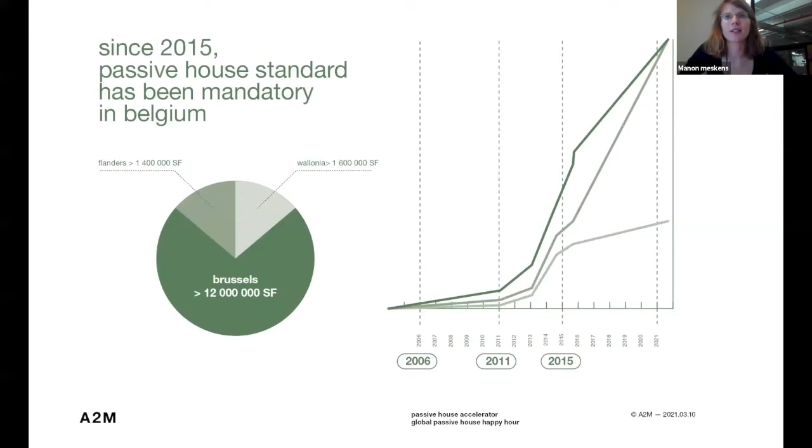The reason passive house was part of my education program is because since 2015, passive house standard has been mandatory in Belgium for new buildings and for renovations. So the number of passive house buildings increased exponentially over the past 10 years, especially in Brussels.

Today you can see all kinds of buildings, all types of programs that are passive house in Belgium. It's very inspiring, and they all look very different. You have Jean Nouvel's tower here for the police headquarters, and you have the parliament of Brussels, also a very unique building.

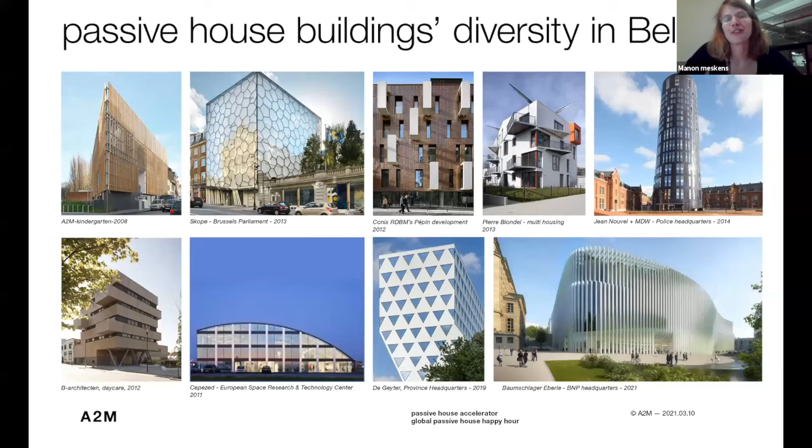We'll soon have a prison that will be passive house, which is kind of funny. When you think about the buildings in the States that are passive house, they're very fancy buildings, and we're going to have a prison. I just thought it was unique.

Sébastien Moreau, the founder of A2M, started designing passive house buildings 21 years ago. With this long experience, we passed the point where passive house standard is standard. It should be mainstream and accessible to everyone.

Our team is composed of engineers, and we start the energy analysis of each of our projects at the conception phase, which helps a lot to keep the cost as low as possible. Today, A2M has 3 offices: one in Brussels, one in Lisbon, and the New York office that I manage. I'm in New York right now.

For tonight, I wanted to focus on 2 retrofit projects because retrofitting is going to be a big part of our job to improve our cities. With COVID and the work-from-home situation, I'm sure a lot of office buildings will have to be renovated, probably into apartment buildings.

The first project I'll go over with you is les balcons in French, the balconies in English. It's a renovation of a former office building from the 80s into 92 apartments with office and retail spaces on the first floor. We managed to keep the cost at

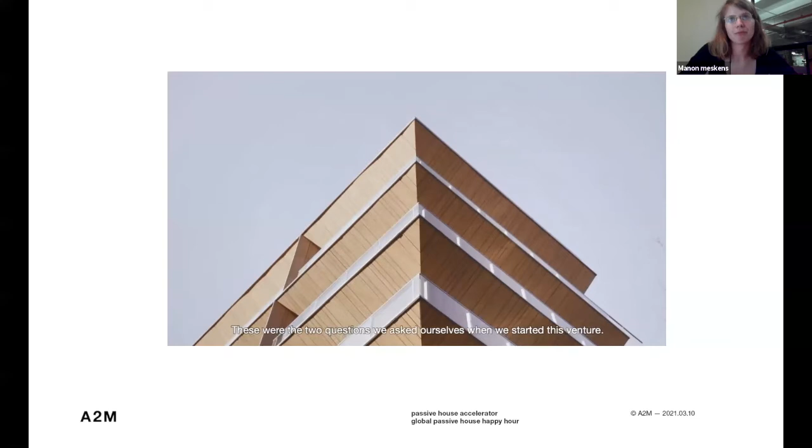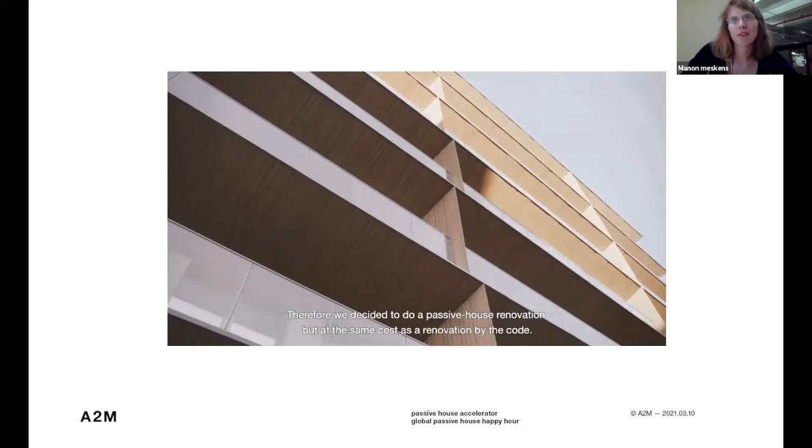The biggest challenge was to manage solar gains in our favor, so we decided to integrate continuous balconies on the south facade. Most of the apartments are facing south, and if not, they have double orientations, east and west,

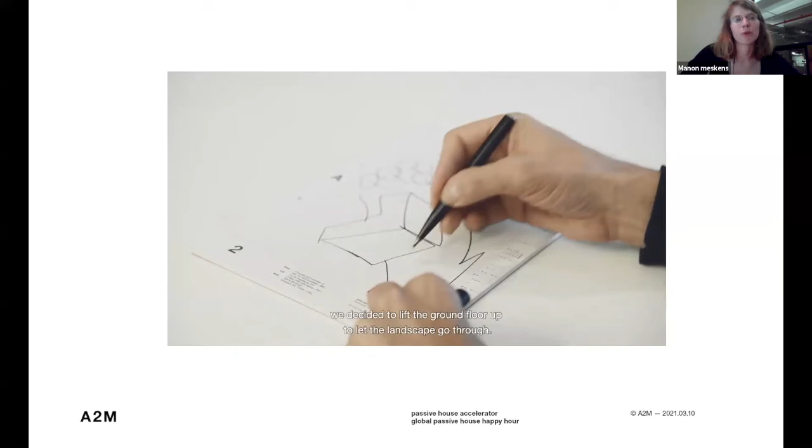which helps a lot for natural ventilation in the summer. Because of the shading devices, the balconies, and natural ventilation strategies, there's no need for mechanical cooling for this project. It's also the climate in Brussels, which is very similar to Seattle.

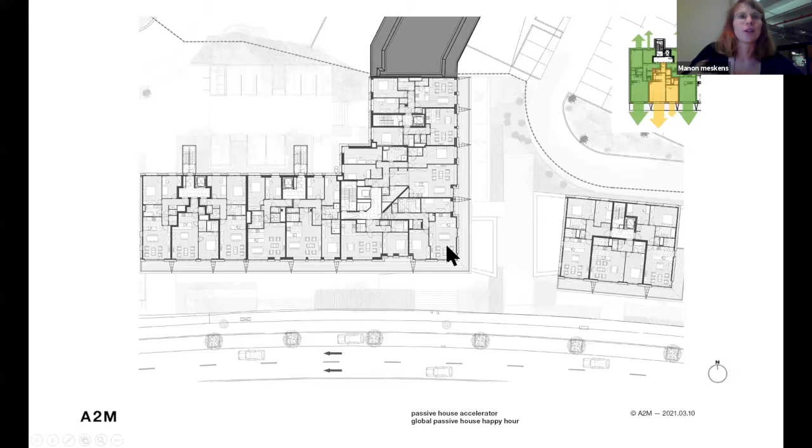I don't have time to show the whole video, but here you can see the large continuous balconies along the facade, and the apartments are double oriented or sometimes triple, which also allows for very good natural lighting.

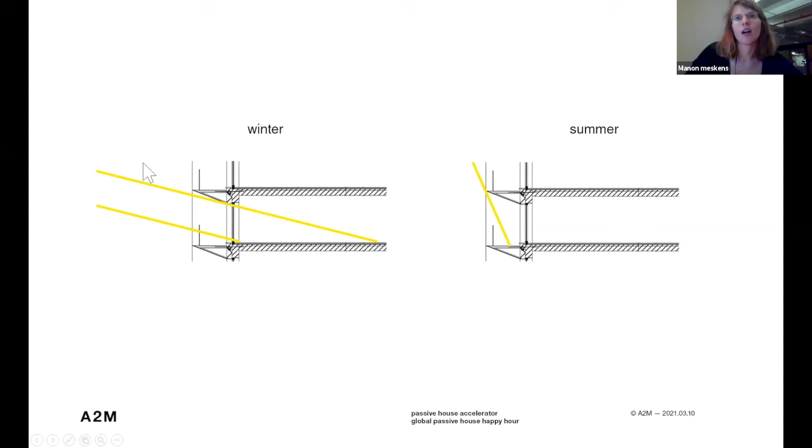The continuous balconies helped reduce the solar heat gain during the summer. As you can see here, we dimensioned the balconies so that in summer they would block the sun, and in winter they would allow the sunlight to get into the apartment.

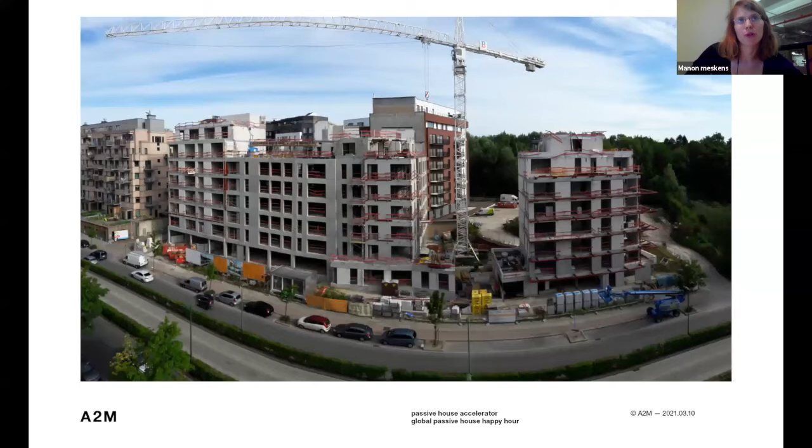This is the bare existing building, and this is during construction. So we added some extension on the side of the renovation.

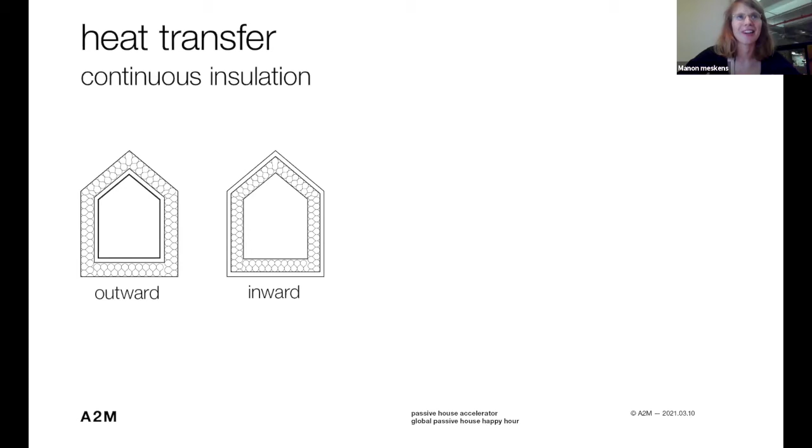We decided to go with outward insulation since we didn't want to keep the facade, the very ugly facade wasn't necessary. And we play with the insulation to create diagonal cutouts in the facade. So the punch windows are a different style.

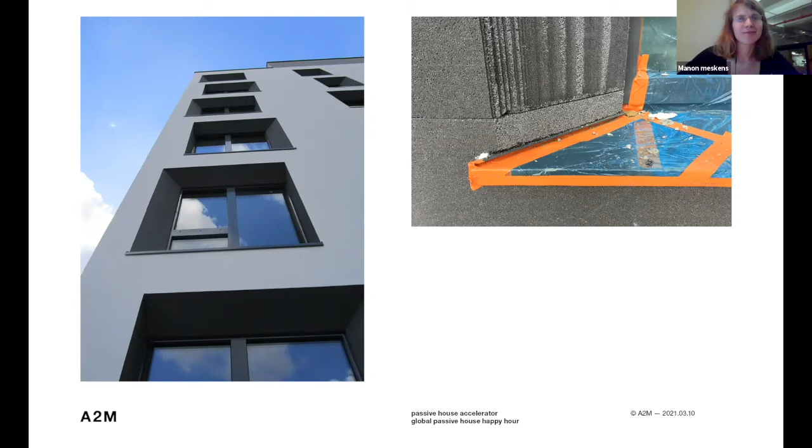And this is the detail that we do. As you can see, we have an airtight membrane here in blue, and the plaster inside is providing the airtightness.

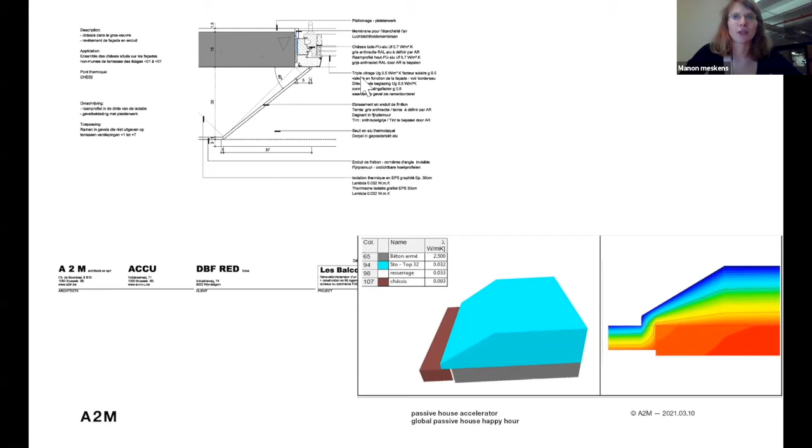You can also notice that we aligned the frame, the window frame, on the bearing wall, which is typically not what we're supposed to do, because it's better if the window is cantilevered, but we use a little trick. So here in the A detail is what you're supposed to do. You're supposed to suspend the windows so the insulation is continuous with the frame.

And the psi value is great, 0.0035. In detail B is the worst case, when you put the window frame on the bearing wall, and so there is a thermal bridge. It could be worse if the insulation wasn't overlapping the frame, but still not great. The psi value is 0.021.

And the detail C is much better and very cheap, much cheaper, but not as cheap as it could be. We're using Perinsul, so you put the window frame on the Perinsul block, but we decided to do something even cheaper, and it's to use just light aerated concrete blocks underneath the window frame.

So we ended up with a psi value of 0.016, which is clearly still a thermal bridge, but we consider it into the energy balance of the building.

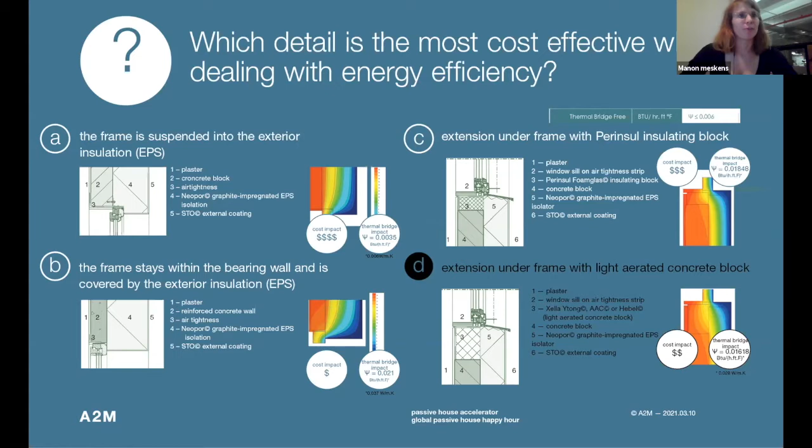And we use the same aerated concrete block for many details. Just like the parapet, instead of wrapping the parapet around with insulation, we prefer to thermally block the parapet with an aerated concrete block, and it does the trick.

The other substantial thermal bridge was, of course, the balconies. We used steel frame wrapped with rock wool and EPS covered with Trespa wood panel veneer.

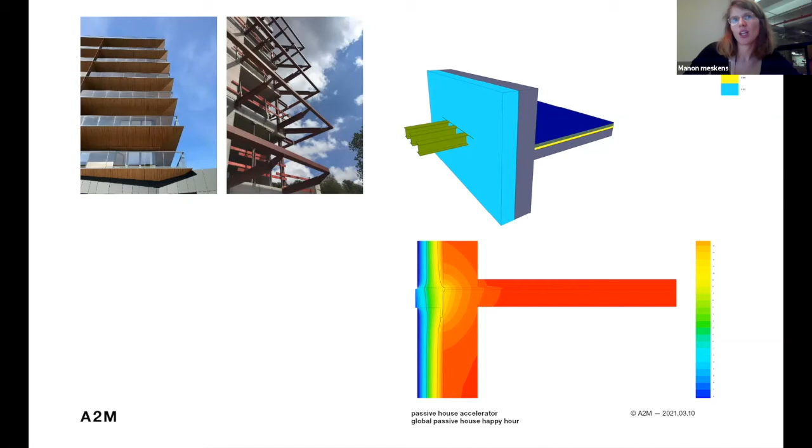Here's a detail. So, yes, you can't see all of it, sorry. So in this detail, you can see here the mineral wool, the rock wool with the EPS.

The shading device is outside the envelope, and it's hidden inside the insulation. And there is a thermally broken piece of plastic shim plate here that helps to thermally break the envelope. And we chose a mineral wool here because of fire restriction.

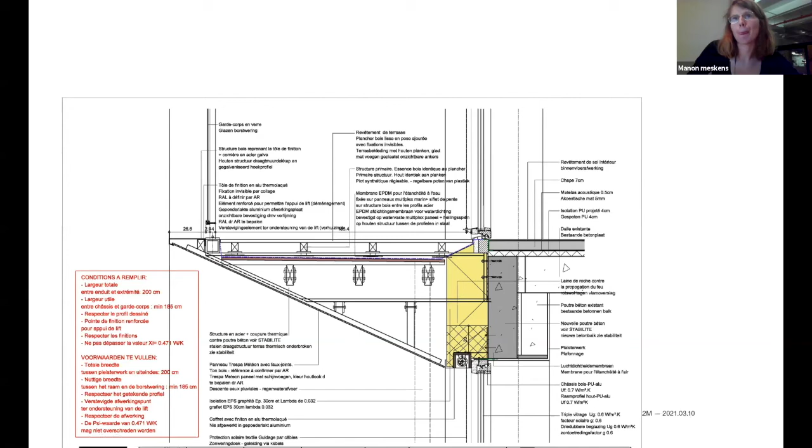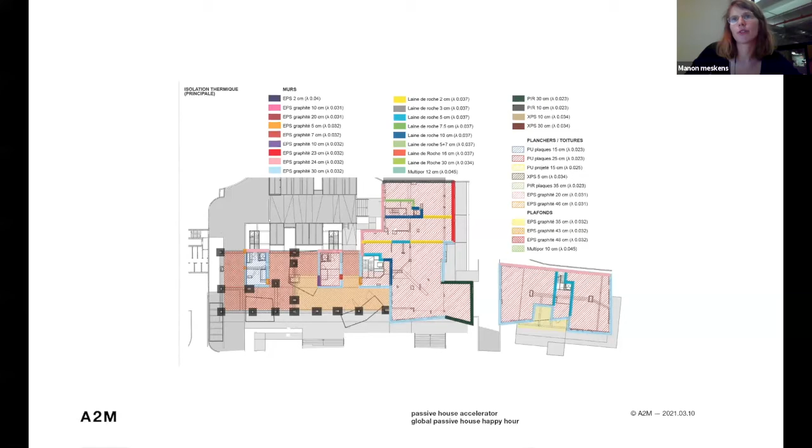So this is one of the typical documents that we always share with the general contractor, so there's no confusion on what type of insulation to use for different areas of the project. They just look at the paper and they know.

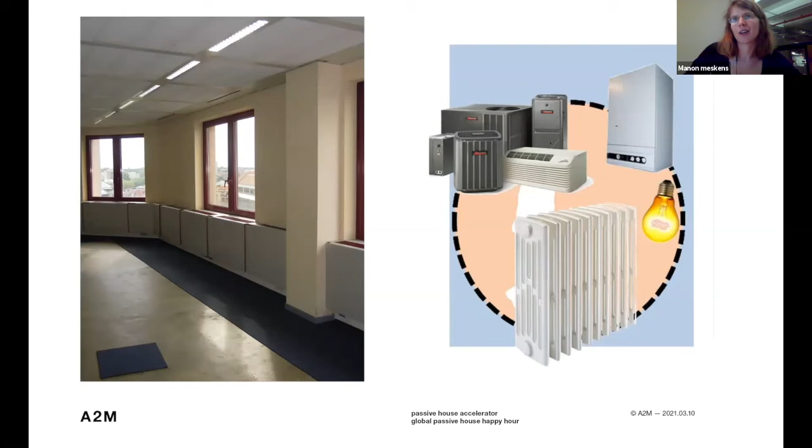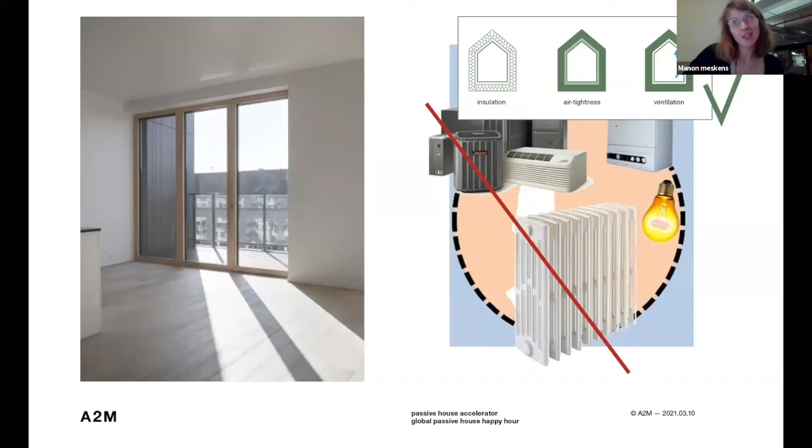This is the interior before renovation. And as you can see, the radiators were taking up a large part of the wall area. And now we eliminated the radiators and increased the window size, allowing more natural light. So more heat gain too, natural free heat gain.

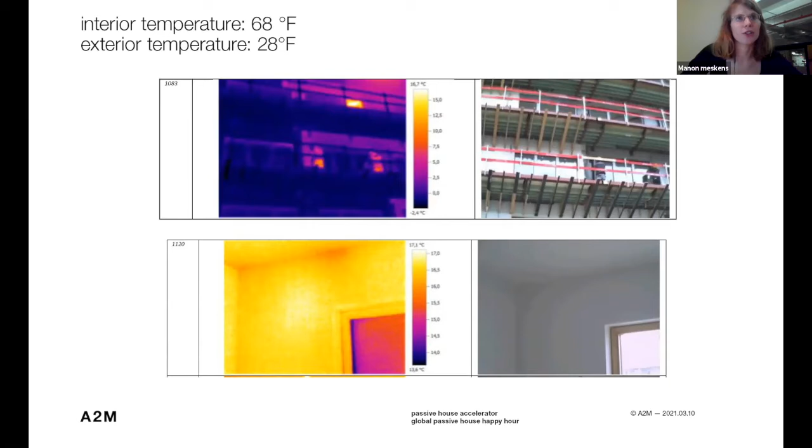During the construction, we always integrate thermal images to make sure that the temperature changes are homogeneous. And so we can check that with the general contractor, and if there is an issue, we can take care of it with him.

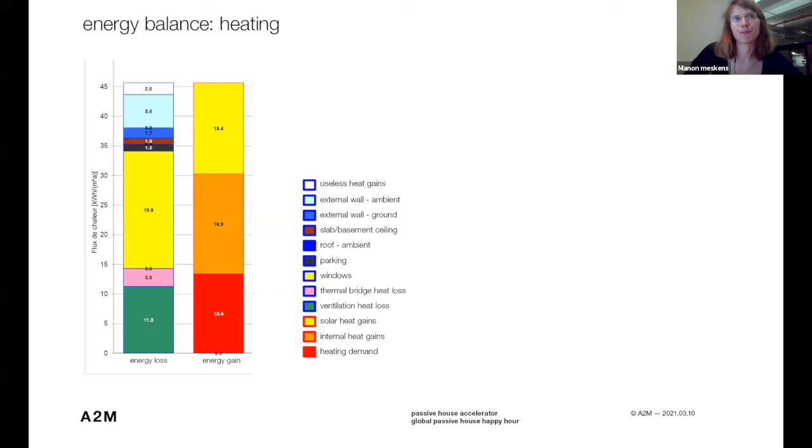We ended up with a blower door test that passed with 0.52 volume per hour. And the building was Passive House certified in 2020.

And we decided to divide the building into 5 blocks for certification. First, we thought about doing it by apartments, but it was a little tricky for the certification, much harder to get the certification if you do that. So the only downside about the block situation is that the primary energy was much more because of the ventilation rate, which had to be higher.

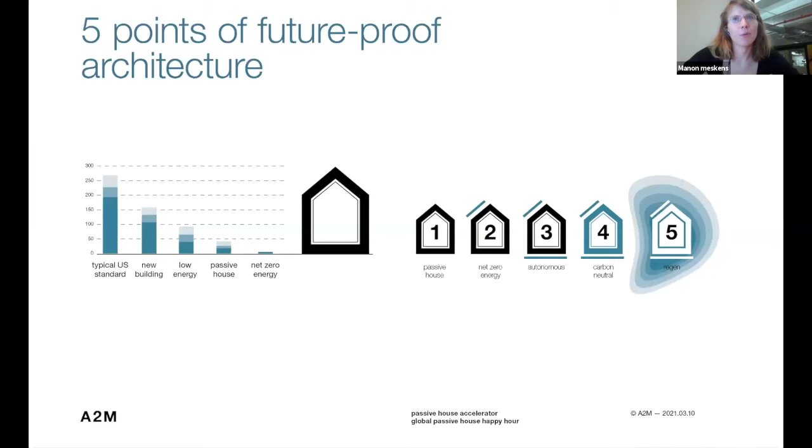The second product I wanted to go over is our new project Marnix. We are working on the renovation of the ING bank headquarters, built in the 60s by SOM, an American firm. It became a very important landmark building in Brussels, protected by the city. For this project, we have to keep the facade and work with inward insulation, and we wanted to go further than Passive House and reach carbon neutrality.

We have been working with our think tank, FAST, on a carbon calculator. To reach carbon neutrality, we first had to evaluate and understand what we are reaching for. So we first evaluate the standard emissions of the building as if it was built business as usual, so we can understand what we have to compensate. With that number, 4,500 tons of carbon equivalent per year, we had to decide what should be compensated through carbon credits versus reduced in healthier ways, like applying Passive House principles and smart design adapted to the environment.

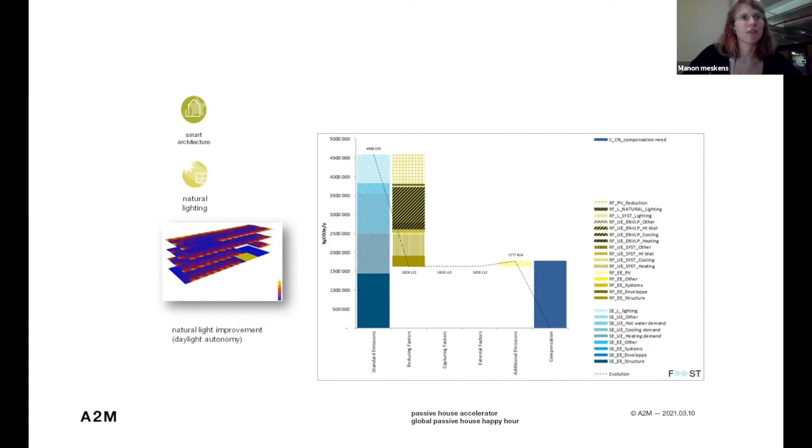For this project, we start with a building with a heating demand of 41 kBTU per square foot per year, and an envelope that has condensation—so really, not passive at all. We are reaching for 3.8 kBTU per square foot per year.

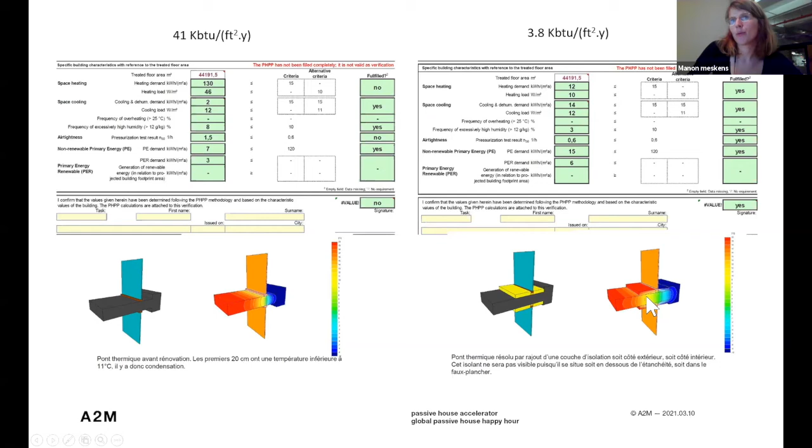Because we want to keep the original facade elements, we decided to insulate from the interior, but we didn't want to increase the budget by cutting out the floor slabs and integrating insulation between the facade and the slab. So we went for insulating the exterior slab and the interior slab. It's not continuous, but we eliminated the condensation you can see here.

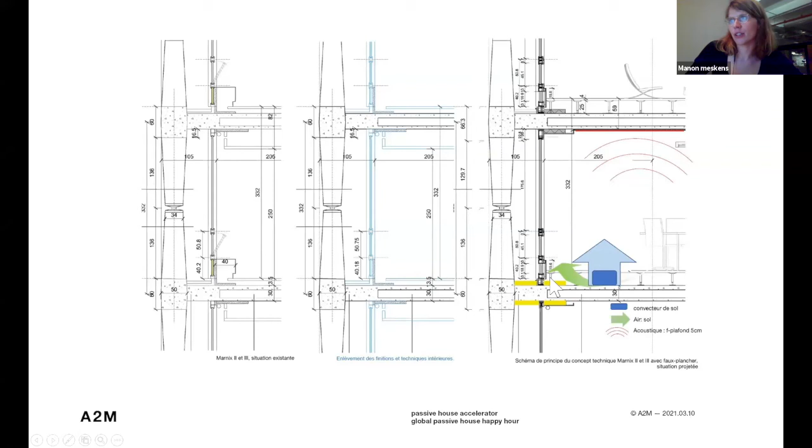Here's the detail. We're still working on it—we just deposited the permit demand, so we're not completely there yet, but it's in the PHPP and it's working right now. The installation won't be visible because it will be tucked underneath the flashing, and we are adding a flooring soffit where the ventilation duct will be hidden, along with the installation inside.

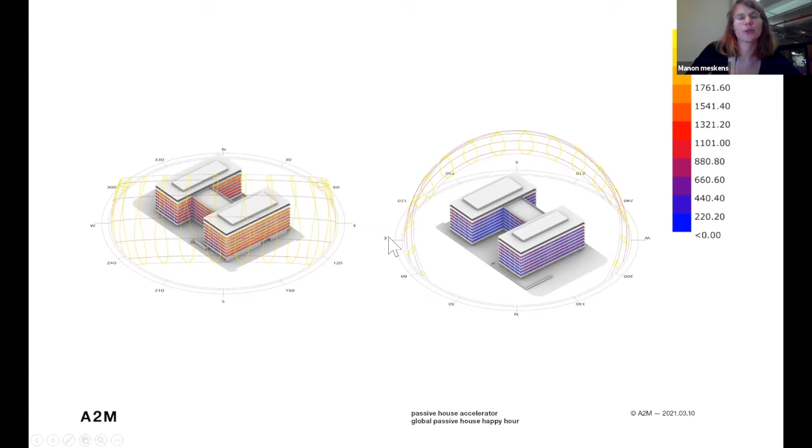Working with solar analysis also increased the performance of our calculations. We use Rhino and Grasshopper to do so. To decrease the carbon footprint of the building, we also work with EcoBat, which provides calculations and numbers about the life cycle analysis of each material we use. It's a software that is accessible online—European, I believe.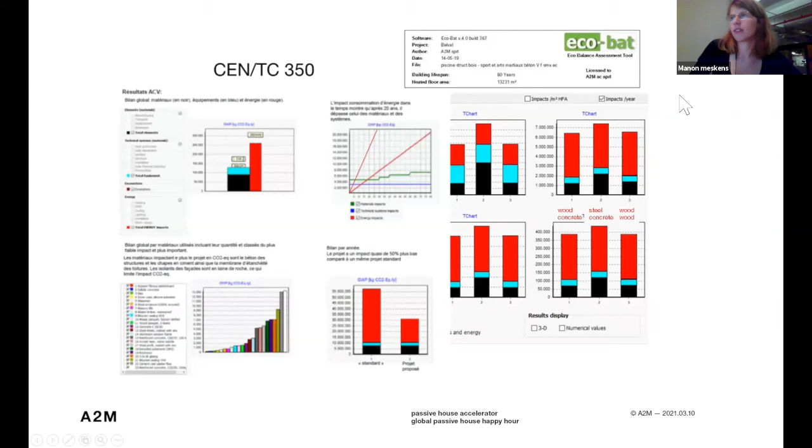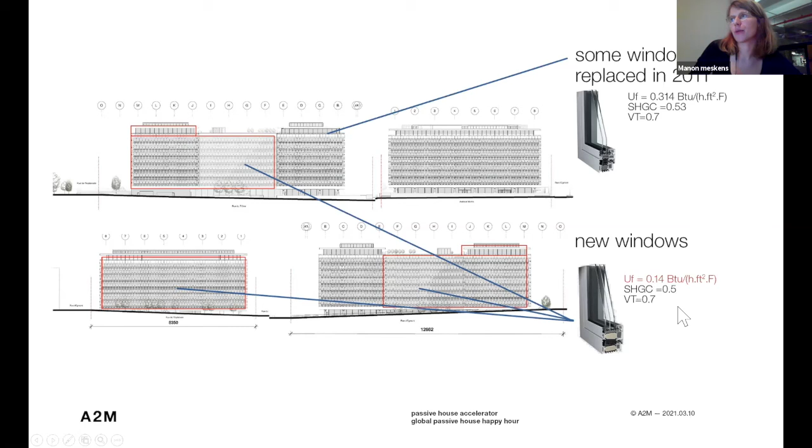For this project, we are able to keep some of the windows because they were replaced in 2011, but the U-value is 0.3, which is far from perfect. We keep and maintain them so we can lower the carbon impact of the building, and it will be taken into account in the PHPP. We are increasing insulation in other areas so we can keep them, but the other, older windows are really bad, so we have to change them to triple-glazed windows with 0.14 BTU per hour per square foot per Fahrenheit.

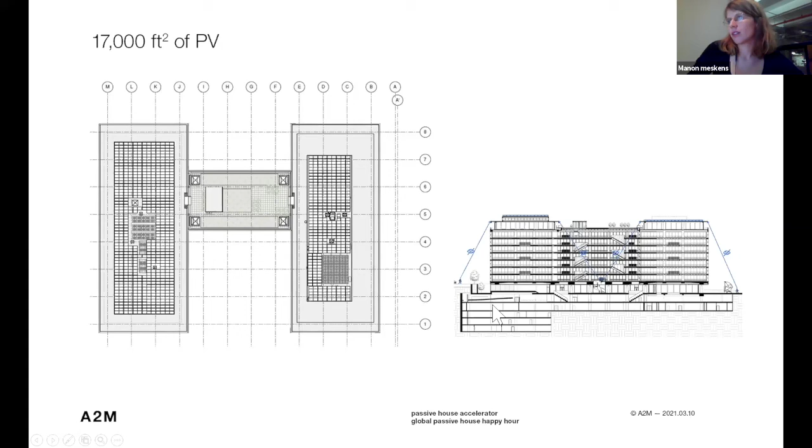That's another element that's kind of high-tech, but really it's just a coating you add on the facade. Because the building is next to a high-speed road, we are implementing a photocatalytic paint on the facade to capture the NOx, which is produced by fossil combustibles. This coating is transparent and composed of titanium dioxide, which, combined with oxygen and light, transforms the NOx into salt. So the building kind of acts like a tree.

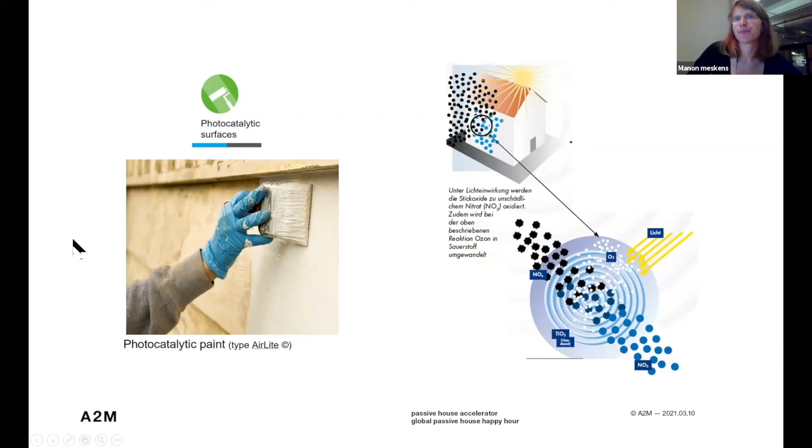With all these strategies, we can reduce the compensation by 74%, and the remaining 26% will be taken care of with carbon credits every year.